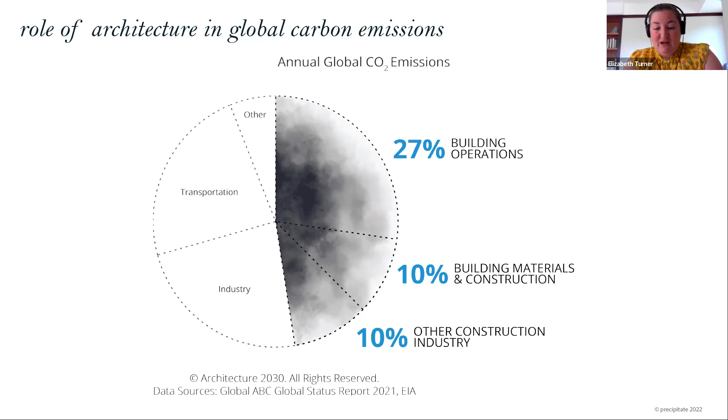So the 2030 Commitment decided to take this on in 2010 by saying that they would reduce from a baseline of 2003 emissions 60% by 2010, 70%, 80% today, moving to 90% in 2025 and carbon neutrality in 2030. So this seems really simple, right? Like, this is a great plan. We're going to reduce every 5 years a little bit more, and we'll have solved the built environment's role in climate change.

In reality, there's about 400 architecture firms that have signed on to this commitment. Last year, I think it was 17 that actually met that 80% reduction goal. A lot of people are signing on and tracking their projects, but not achieving that goal. And that is kind of the bare minimum that we need to mitigate the worst impacts of climate change from the built environment. So we figured we need to do something differently.

And for us, systems thinking is a really big part of this. So the traditional approach says, well, the role of architects is just to design buildings. That's all we're going to do. The systems approach sees buildings as one part of a larger system. So we were finding that it was really hard to design buildings that reduce their carbon emissions in those traditional systems. And so we needed to create a new system and take a systems approach to addressing the reasons why we couldn't build buildings that were meeting the carbon emissions goals.

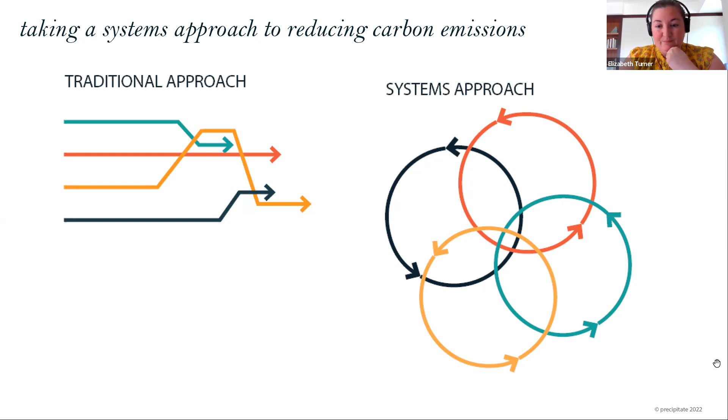And then planning has been a really important part of this too. So we worked with Bemidji State University on their climate action and resilience plan to look at a community, a system as a whole, and figure out how to reduce carbon emissions and be resilient in that community and campus. So their president, Hensrud, signed the climate commitment in April of 2019. And this is through Second Nature, their climate commitment for carbon and resilience. It combines both of those into one climate commitment.

The focus of our work really became quite quickly that we needed to build relationships through appreciative inquiry and focus on building relationships as a way to make the community more resilient. So in nature, we know that systems that have more interconnections are more resilient to future disruptions. And we found that to be true in human relationships as well.

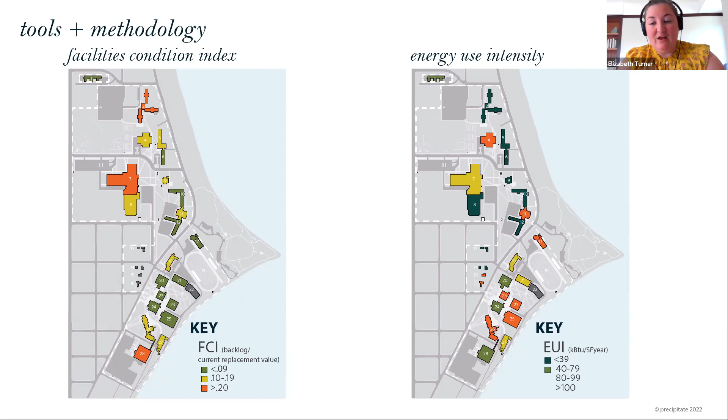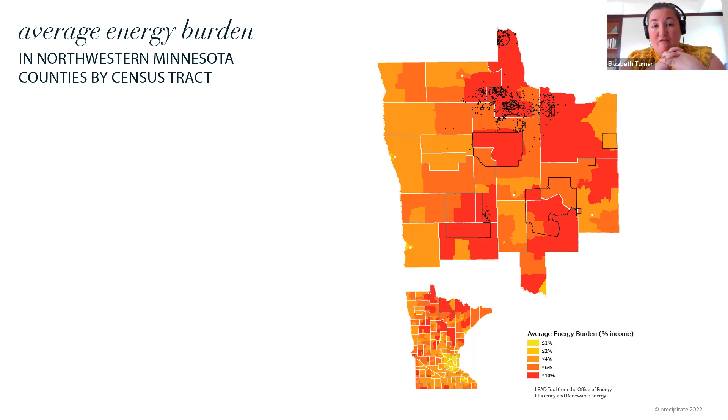And energy burden was a really important part that we discovered. So connecting carbon emissions in the form of energy use to people's lives. And as you can see here, there's a really high energy burden in this part of the state. Part of the reason for this is that instead of natural gas, a lot of homes use electricity, and it's also colder. So there are quite a few places where the energy burden is 6 to 10% or more of people's annual income.

We did find that a strength is that a lot of the affordable housing and housing in the city is really close to parks. So this was a strength that we were able to visually show. And that led us to our next project, which is the City of Minneapolis Climate Equity Plan. And I'm going to let Imani speak about our work with the city on climate and equity in this planning process, which we kicked off in February and is currently underway.

As you can see, sustainability efforts started in 1990 with the stakeholder group called CEAC, Community Environmental Advisory Commission, being established. Later in 2013, we see the first climate action plan adopted by the city, followed by the commercial benchmarking policy. Later, the Energy Vision Advisory Committee in 2014, which makes a lot of recommendations from the community to the Clean Energy Partnership Board. And then in 2017, our green zones were designated, and later on, the utility franchise fee was increased. All really important milestones in our work to inform our most recent work on the climate equity plan.

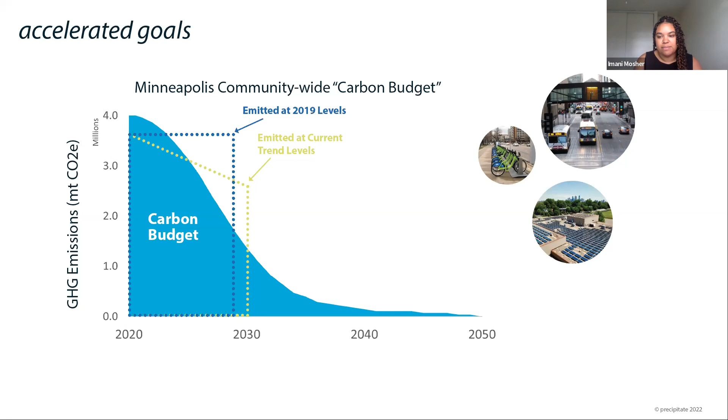Like Elizabeth mentioned earlier, we have been listening since February. So far, that has looked like engagement sessions, listening sessions, tabling at community festivals. We had a table at Juneteenth and Somali Independence Day. We have a survey out for people to access at any time to give us comments and feedback, and really just trying to connect with as many people as possible.

We are getting ready to move into our testing phase, where we're going to take everything we've heard to establish some working groups and a steering committee, which will comprise folks who were part of our previous engagement in the listening sessions. They're welcome to join, and we will make sure that it sounds good with everybody we've connected with so far. And then we'll go into our deciding phase, where we'll start drafting with the goal of having a climate equity plan to present to council in January of next year and hopefully be adopted.

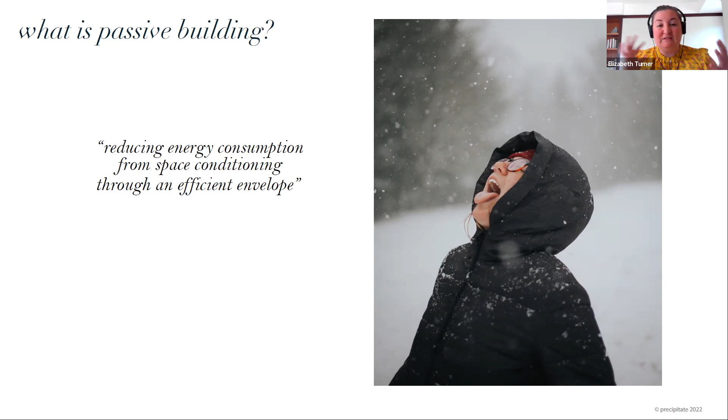You might hear people say, like, it doesn't make sense to have triple pane windows. Well, it doesn't if your walls are not also well insulated and you have air sealing as well. So thinking about the whole building as a system within this larger societal system is where we focus our energy.

So the passive house principles themselves, there's 5 of them. 3 of them are passive strategies meant to reduce energy and just shrink the amount of energy demand that the building has. So we have a really airtight building envelope. This looks like air sealing, making sure that it's continuous around the whole entire building, and then super insulated and thermal bridge free.

So you'll see walls that are a little bit thicker that have more insulation, and also continuous insulation. So it wraps the entire building, and you don't have breaks for like a stud wall and wood that's kind of sticking through that insulation, which is just a highway to let cold temperatures into your home, and also creates some moisture and mold issues.

Supporting that, then, that reduced need for energy is energy recovery systems. So fresh air where energy is recovered when it's leaving the building to preheat the air that's coming into the building, and then really efficient mechanical systems to meet that smaller energy demand.

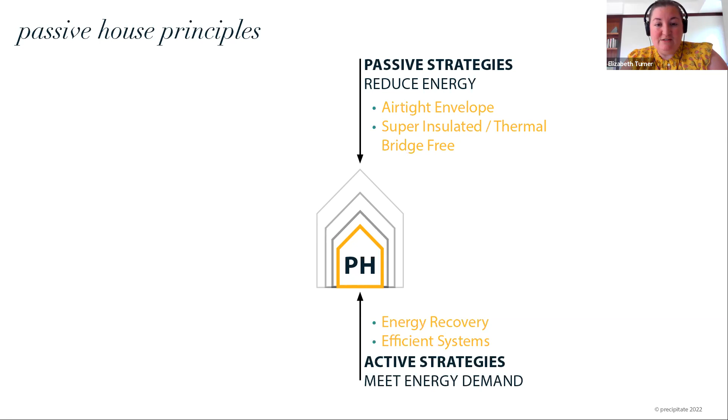So yeah, I'll talk a little bit about the additional benefits to Passive House that go beyond energy, or kind of are like a bonus from the decreased energy demand. So the decreased energy demand can lower utility costs, which is really important and great for affordable housing, allows the building owners to decrease utility costs for the tenants. This also opens doors for other homeowners to really explore and invest in renewables and become more independent with their energy. All of these things supporting equity and environmental justice.

More technically, Passive House does really amazing things for indoor air quality through increased ventilation. It has increased thermal comfort and noise control, as well as really streamlining the layout of water to reduce the distance it needs to travel and have really efficient water heaters so that we're not using any extra energy to get hot water and only heating it up when we really need it. All of these things really important and meaningful benefits to Passive House as a result of the decreased energy.

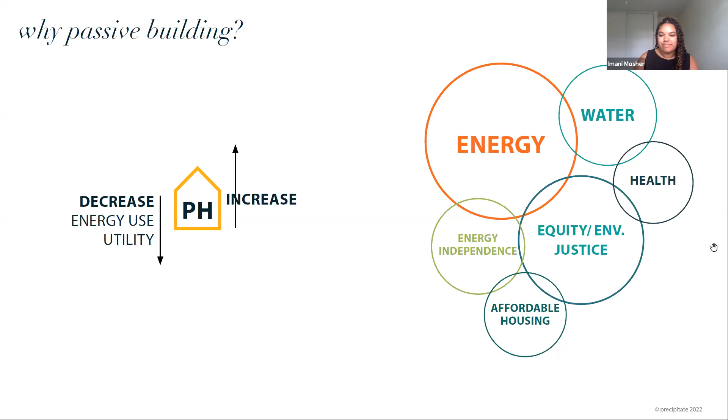So this slide's just kind of highlighting some of the benefits I touched on earlier. So the high performance building envelope leads to more thermal comfort and moisture control, which is really important for mold and dust, and gives us more fresh air in our homes. That is one of the occupant benefits. It's quieter, it's more resilient to extreme weather and power outages.

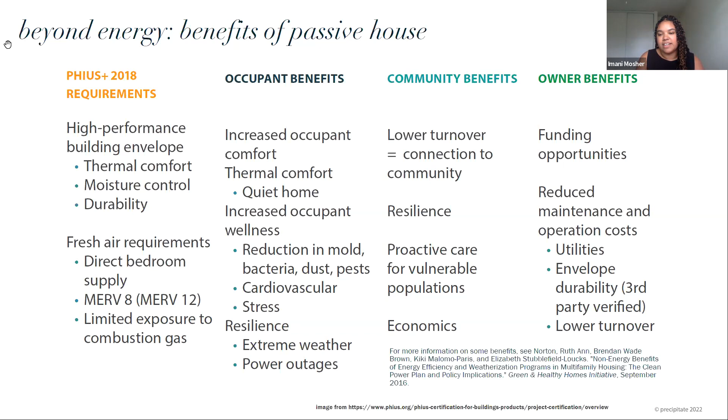And this expands to community benefits where people can become more invested in their spaces and more connected to their communities, leading to lower turnover and more resilient, strong communities. And the owner benefits as well. Using Passive House, there's lots of funding opportunities, and the reduced maintenance and operation costs that I mentioned earlier can really lower costs for tenants and lower turnover in that same way.

Thanks, Imani. And one note here is sometimes it's really hard to see these benefits because of what's called a split incentive. That's when people who own the building are different than the people who are paying utility bills. So there's no incentive for people who own the building to spend money on energy efficiency upgrades. So that's one of the reasons that public policy and supportive programs are really helpful to getting these projects built, to kind of mitigate the impact of that split incentive.

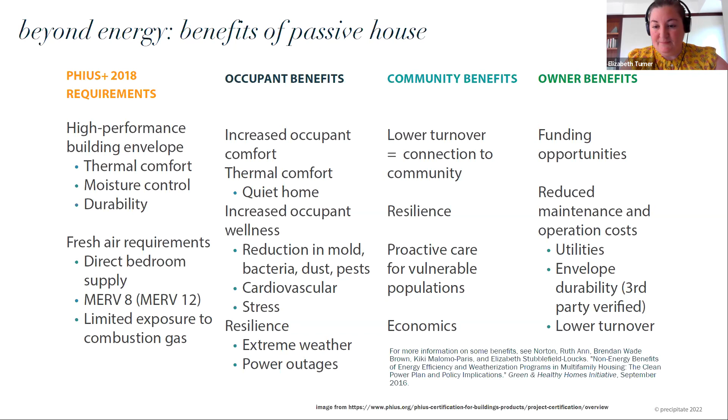So here's an example of some of the buildings that we've helped get Passive House certified or Passive House pre-certified in the past few years here. Hook and Ladder was in Minneapolis, and that's 56 units of affordable housing. Verdant is in St. Paul, and it is currently open and operating, and that's 82 units of affordable housing. In Madison, there is a townhome that will be Passive House certified, as well as their community center for the entire townhome development.

And in Northfield, we worked with the Hillcrest Village team to model their duplex to see the most cost-effective path to get to net zero. They ended up not getting certified in Passive House, but they got really close. They figured out a cost-effective path to net zero, which instead of just having more solar panels, they upgraded the windows and building systems and added increased insulation and made a really comfortable building for the people who live there, and actually found that that was a more cost-effective way to get to net zero than just adding more solar panels alone.

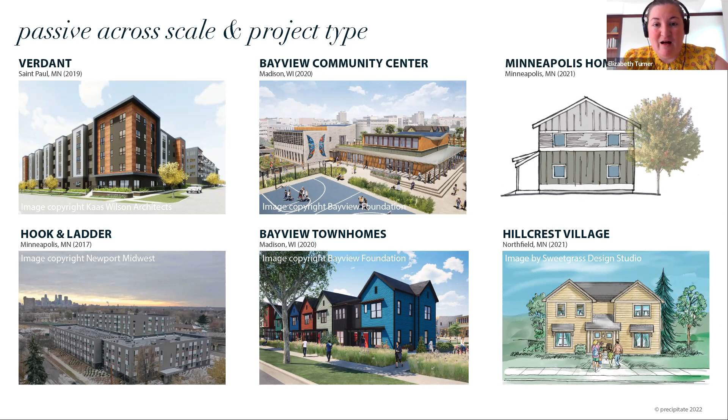And then we are working as architects for Minneapolis Homes in Minneapolis, doing 5 Passive House certified projects that will be for sale for owners. So this is kind of applicable from the single family up to the 82 unit, and there's even some skyscrapers in New York that follow this method as well, and it's starting to get to be more public and commercial buildings as well.

I think this graph really shows why we care about it. So the CSBR did a study on kind of the average amount of utility use and energy use in affordable housing. So in 2015, this is 51 properties. The average use was 76.2 kBTUs per square foot per year. You can see the majority of the use is for space heating in red, and some in domestic hot water and electricity as well.

With the PHIUS Plus certified building and modeled in WUFI Passive, that space heating use is really drastically reduced. We have more space cooling because these buildings are air conditioned, where a lot of the currently existing affordable housing is not air conditioned. So that's increasing slightly. And then our domestic hot water use is reduced as well. But it's really interesting to see that we're using about as much energy to heat domestic hot water as we are to heat the air in the building.

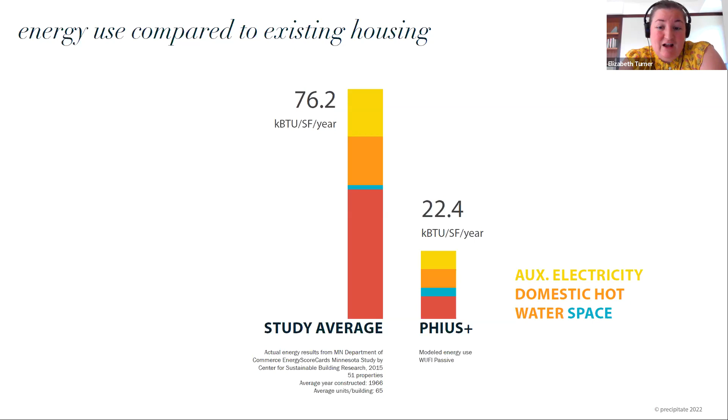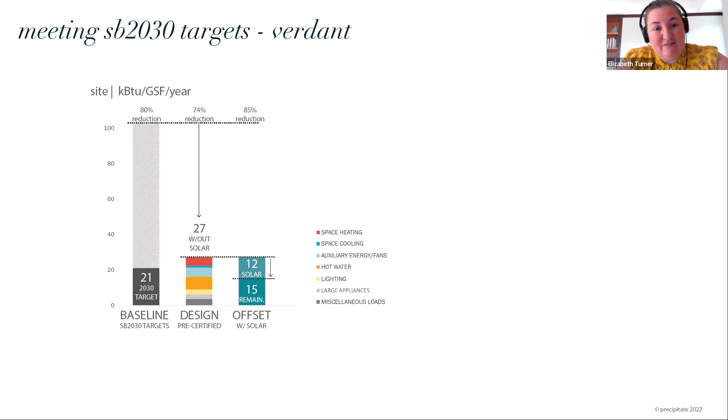Similarly, for the Verdant project, we're getting that SB 2030 goal coming back in. So the goal is an 80% reduction, and our target was 21 kBTUs per square foot per year. Without solar, we're coming in at 27, so it's a 74% reduction. You can see again a really small use for space heating and cooling, which is what we're focusing on with Passive House. And then with the solar needed to meet Passive House standards, we got that down to 15, for a total of an 85% reduction from that baseline energy use.

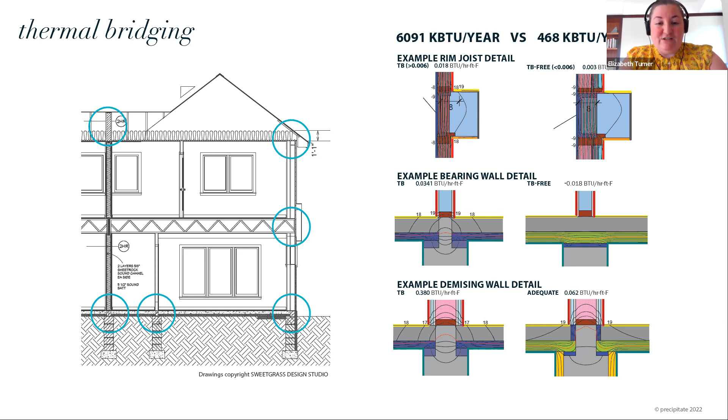But we've talked a lot about reducing carbon emissions from operations, so energy use in the buildings. But when we think about how much we need to reduce carbon emissions in the next 5, 10, 20 years, the operational carbon is only about half of that picture. Based on business as usual projections, the other half would be embodied carbon. So all of the carbon emissions that go into building the buildings that we're constructing now. So that's a part that we're wanting to think about as well.

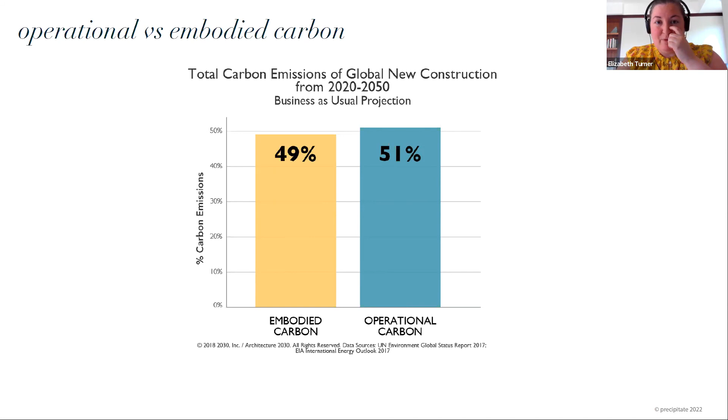All right. So I've been really lucky to work alongside Precipitate and all my wonderful colleagues there. I don't come from a background in architecture, but I certainly recognize the really powerful levers that exist in the built environment to address climate change.

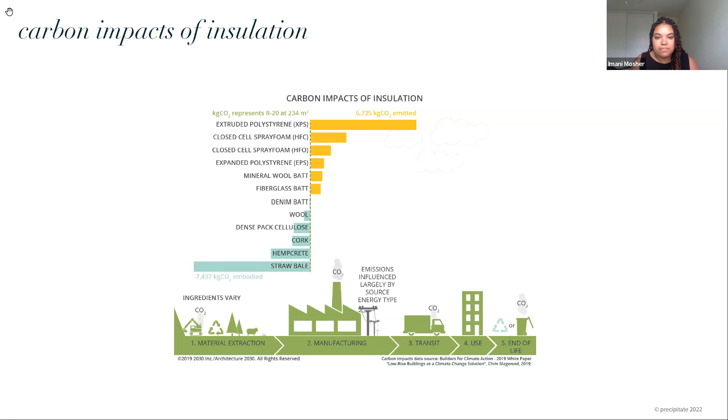So the next slide is a really cool picture of a project that we have been a part of that is a straw bale home in Uptown Minneapolis. It's been really cool to see this process go on, especially in our climate zone. And I think, Elizabeth, I'm going to hand it off to you to talk more about the technical stuff.

Yeah, so when our client first came to us, they wanted to build a passive house. And then as we started talking about what the insulation would be in the walls, they're like, I don't really want all that foam and that embodied carbon to be in my house. So they came to us with the idea of straw bale, and we figured out how to make it work.

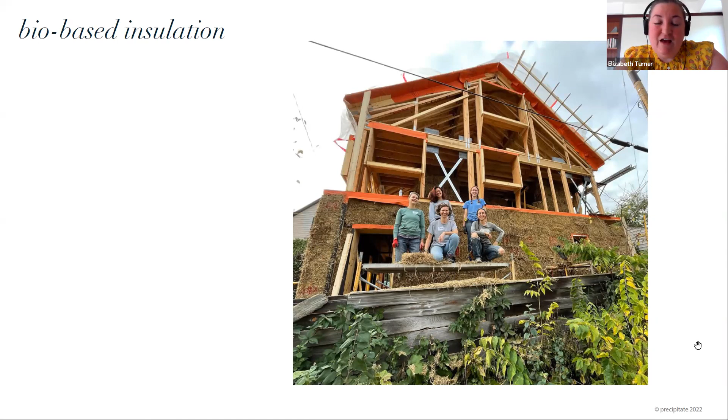One of the additional things that they really liked is that people can build it together. So they hosted last fall a lot of community build events where people got to have hands-on training in how to build straw bale and work together. So we were not sure, being straw bale, if the building would struggle to get Passive House certified. But there's still a 70% energy reduction compared to a code baseline building, even with being straw bale.

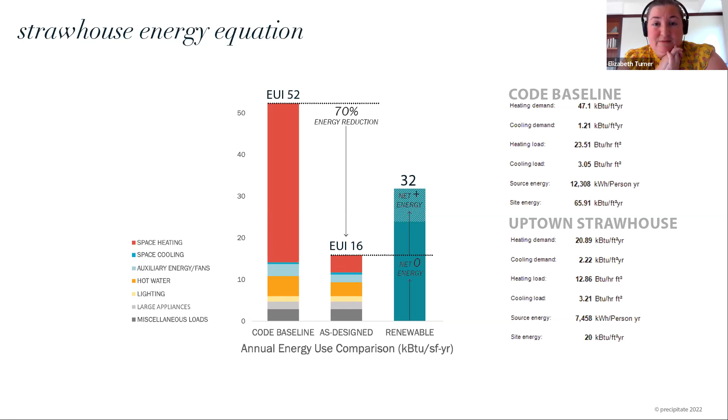And because they have solar panels on both their existing triplex on the property and this building as well, the building will be net positive. And so it'll produce more energy than it will consume and have walls that sequester more carbon than they use.

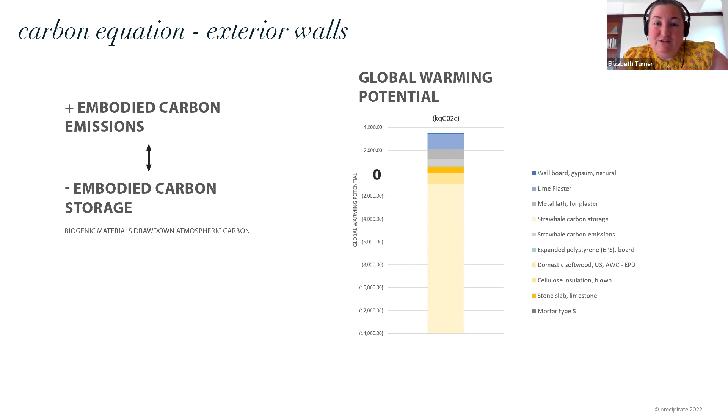So a lot of public policy sometimes focuses on just moving to renewable energy, which is really important. But sometimes that focus means that we don't think about renewable energy until the very end, bidding and construction or occupancy in some cases, where you have then lost the ability to reduce the energy consumption of your buildings.

So we like to think about the operational energy that the buildings are going to use way at the beginning in pre-design, and have those discussions, talking about the embodied carbon that's going to be in those buildings in pre-design as well, and really think about how we can reduce the cost and increase the impact of the carbon strategies that we're making. And we think about this too in the larger planning projects and advocacy work that we're doing.

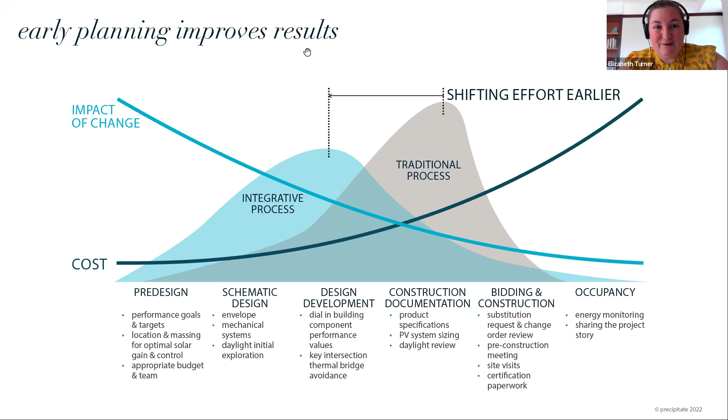I think I'll go ahead and get it started with Elizabeth. You mentioned a term called thermal bridging, and I was wondering, if I may have missed it, if you could kind of define that or give an example of what that is.

Yeah, so you might not be familiar with how walls are constructed typically, and we have a 2x4 piece of wood that is placed every 16 to 24 inches within a wall, and then we fill in usually fiberglass batt insulation between that. And then we put siding on the outside and drywall on the inside. Well, that 2x4 is directly touching the outside.

And so in the wintertime, it gets really cold because there's nothing protecting it from the outside environment. So when it is touching the inside of your home, it's a cold spot in the wall. And basically, like a radiator, it's kind of a fin that lets a lot of heat leave your building. It's also cold, so you will get the warm air from inside,

if you have any punctures in your air barrier, condensing on that cold 2x4 and leading you to have moisture in your wall. So it's an issue from both energy use and then just durability and resilience of your wall as well.